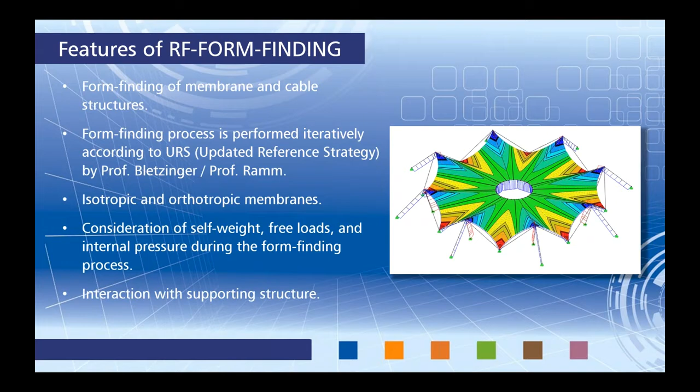Our other add-on module, RF Cutting Patterns, uses the minimum energy method for a very accurate cutting pattern. Essentially, we're turning this 3D membrane element into a 2D cutting pattern via the minimum energy method. We can also take into account uniform or linear compensation by warp or weft directions, meaning typically these membranes are going to be stretched when they're applied to our structure. So for the 2D cutting pattern, we can take into account that compensation. We can also apply these compensations for boundary lines around the 2D cutting pattern, so it doesn't necessarily need to be in the warp and weft directions.

We can also allow for different allowances, such as for welding and for boundary lines. Welding for overlapping membranes, maybe we need some additional material. Boundary lines for the upper and lower portions of the 2D cutting pattern as well. There is adaptable data organization, meaning even after we have performed the calculation for our 2D cutting pattern, we could go back and easily add in some additional material for welding and for those boundary lines without having to recalculate the 2D cutting pattern.

And lastly, I'll show you how to output the cutting patterns both graphically within the RFEM printout reports, as well as tables. These tables can be exported directly to Microsoft Excel for further sorting. And lastly, we can export them as a DXF file, open them up in AutoCAD, and show you how to utilize the cutting patterns this way.

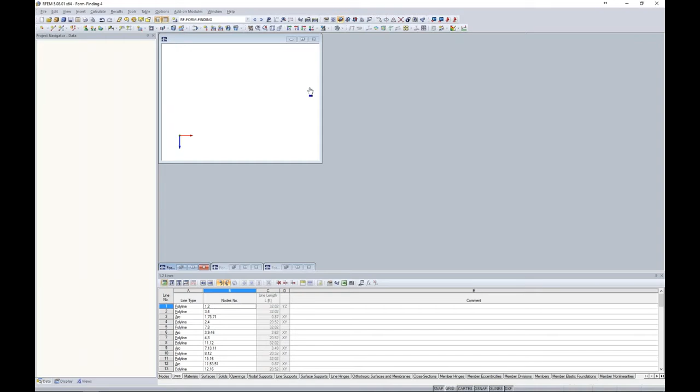So up pops RFEM, and you can see here that we have our basic graphical display in the center. We have our tables to utilize down at the bottom. Over on the left is our project navigator, which controls some of the input data. We'll also see our results available here, and lastly we have all of our tools up at the top. Today we'll be using all of these options.

I want to begin with drawing a basic line element. So up in my toolbar, I can choose to draw a new line, and you'll notice we have many different line types. We have a lot of AutoCAD-like capabilities within the program, so things like complex geometries, which is quite common for membrane type structures, is really no problem to model within RFEM.

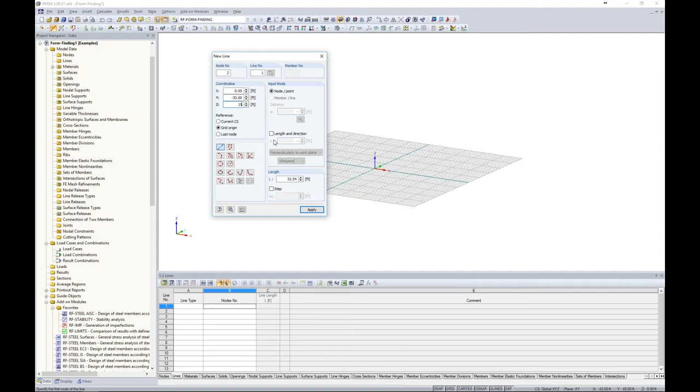To begin with, we're just going to do a typical straight line. I could draw this graphically in my viewport over here on the right, but I can also just enter in a couple nodes. For example, 0, -5, 35, then click apply, and enter my second node at 0, -30, 15, and hit apply. Now you can see we just have this line element in our 3D view.

I'm going to select this entire line and the nodes and use my rotate copy tool. Here I can specify that I would like 9 copies at 40 degrees, rotating everything about the origin 0, 0, 0. We have a nice feature down at the bottom: if I click on expanded settings, I can create lines between my copy nodes, and even more so, create surfaces between those lines. So now when I click OK through all of these dialog boxes, I have my conical structure with just a few clicks of a button.

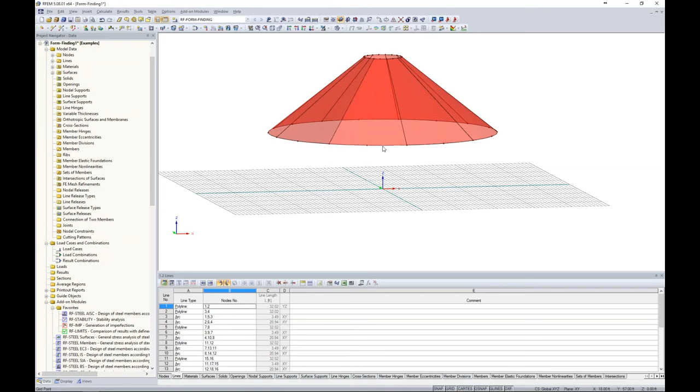Now turning this into a plan view, and turning off my grid down here at the bottom, I'd like to create cable elements spanning between my longitudinal lines here. Now a cable element certainly can't be constructed in the field as an arch type line like this, so we need to create straight lines. How do we quickly do this?

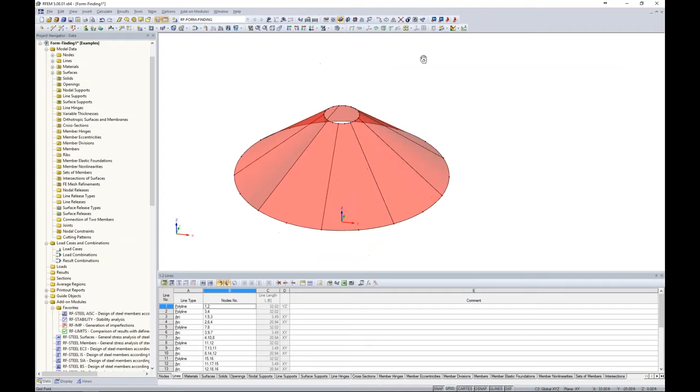I'm going to turn this into an elevation view, and highlight all of my lines down here at the bottom. You'll notice that my table 1.2 lines shows me exactly which lines I have selected in my graphical view. Using this feature within the table, I can show the selected objects only, so these are only my lines selected at the bottom of my structure.

The line type right now is set at arc. I'm going to change this to polyline, then using the F8 key, I can quickly copy that same setting down for all of my line elements here.

Now if I turn this back to my plan view, you'll notice these are now straight lines, but I still have this node in the middle that I'd like to get rid of. For this, I'll turn this into wireframe view, and now holding down my control key, all I need to do is graphically select all of my nodes here. Then I simply click the delete key, and I have these straight line elements.

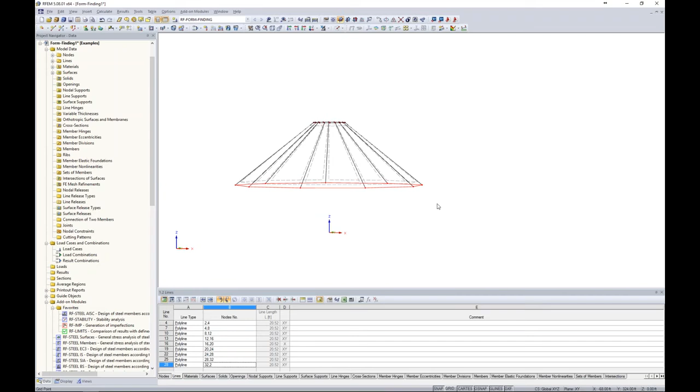So here I launch my cross-section database, and you can see we have many different cross-sections, such as rolled sections, built up, thin-walled, massive for concrete sections, timber. For these elements, I'm going to utilize the solid sections here. We have our filters over on the left, which show some different producers applicable to the Eurocode design, and we also have our AISC database.

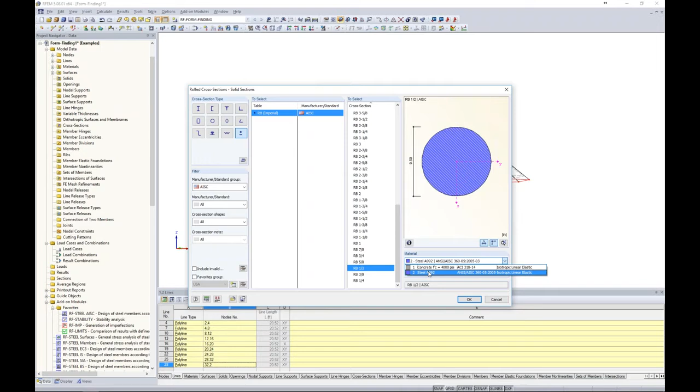Now I can scroll all the way down to the bottom to choose a 1/2-inch diameter cable element. My default materials within the program are 4,000 psi for concrete and steel A992. I'd actually like to create a new material here.

My material database is brought up. This looks similar to my cross-section database as well. I have my filters over here on the left, so you'll notice that under material category, I'm going to change this to stainless steel. Now I have the ASTM as well as Eurocode down here to select from.

Looking at ASTM, I have a very long list of all of my stainless steel materials. We can also utilize our favorites list, which I created a favorites list called USA. These are just common materials that I use quite often for projects, and you'll notice I added stainless steel A479 here. I can select this material and click OK through all of these dialog boxes.

Now the member type right now is set at beam. I actually want to change this to a cable member—that's the element that we're trying to model here. So now I can open up the member type. This is available because I've activated that RF form finding add-on module; otherwise you wouldn't see this option available.

Here we have the cable parameters for form finding, and with this we either have geometry or force. With geometry, we can set a target cable length or a target cable absolute sag, relative sag. With force, we can set a force in the cable or a force density. So these are the properties that we'd like to see after the form finding process is complete.

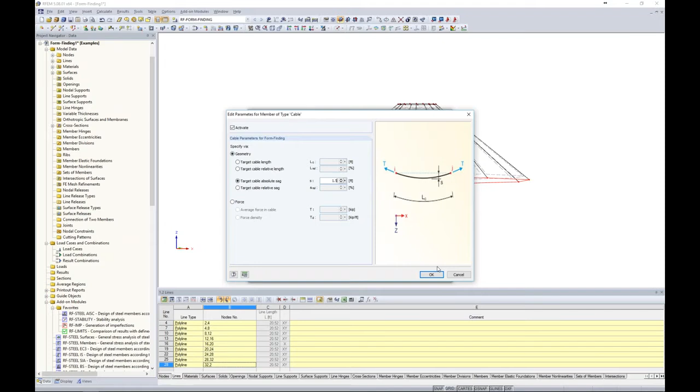When we're choosing geometry, this is maybe relevant for border cables and membrane structures such as what we have today. The force is an option that's maybe relevant for cable webs. For our example, we'll choose a target cable absolute sag of 1.5 feet, and I can click OK. Now that I have set this form finding capability, I click OK, and now we have the cable element specified down here at the bottom.

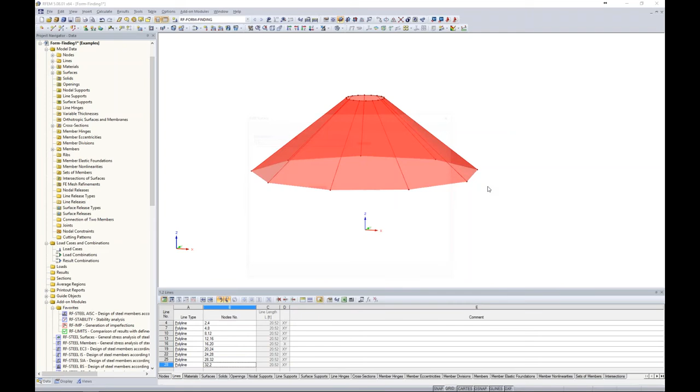So I want to turn this back into the rendered shape to show you guys that right now my surface elements are red. That means there probably is something missing within the program that is trying to flag me. If I highlight all of my surfaces, right click and go to edit, you'll notice that my stiffness is set to null—null means nothing. So we need to put in these material properties as well as our form finding process for our surface elements.

So the first thing I'm going to do is use my drop down to select membrane orthotropic, and here is where I'm going to create a new material. Now, membrane materials are not so straightforward as something like steel A36, A572, for example. This is something that maybe we get from the manufacturer, or maybe we do our own testing on these material membranes.

So when I go to create a new material, I need to first give it a description. Our material model by default is set to isotropic linear elastic. I actually want to change this to orthotropic elastic 2D. Now up pops my dialog box for my stiffness properties.

For this, I'm going to jump back to the PowerPoint here just to show you a quick screenshot of some calculations. For my membrane material, I got this from my colleague in Germany, and basically this is the calculations after placing this material membrane into a biaxial testing machine. We apply different forces, we get results based on stresses and strains with those different forces applied. We do our calculations in order to find out what these stiffness parameters are. So that's just a little history about where these particular membrane properties came from.

So back in RFEM, we can simply apply those stiffnesses here. For example, it was found that EX is 93 KSI, our EY is 84. Our shear modulus is going to be the same in all three directions at 0.15, and our Poisson's ratio is also important at 0.314. Now I click OK.

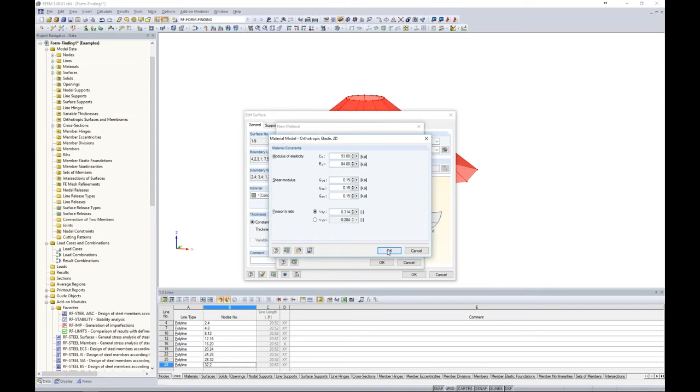So we have now defined the specific material that we'd like to use for these surface elements. Now, similar to the cables, we'd like to edit the parameters of the stiffness. Again, these are options that are available, especially this form finding tab when we activate the form finding module. The type we'll use here is constant thickness.

Under my next tab, constant thickness, I'm going to set the thickness at 0.04 inches. Then I can click on my stiffness matrix to see those values here, perhaps I'm interested in those. Under the form finding tab, this is the availability to define pre-stresses along the warp and weft directions with our form finding module. You'll notice that we have two different calculation methods, both the standard and the projection, and this just comes from the general form finding method URS that I mentioned in the PowerPoint.

Standard is really used for membranes supported by points, arches, or pneumatic structures. Pneumatic just means they are air-supported structures, supported by internal air pressure, which you can see down here is where we define that internal pressure. Projection is used for conical shapes, so that's actually the type we have today.

But just for example purposes, I want to show you what this form-finding deflected shape looks like using the standard method to begin with, so you can see why we've chosen the wrong calculation method. We want to define our forces, defined according to the warp and weft direction, so this is the local X and Y axis.

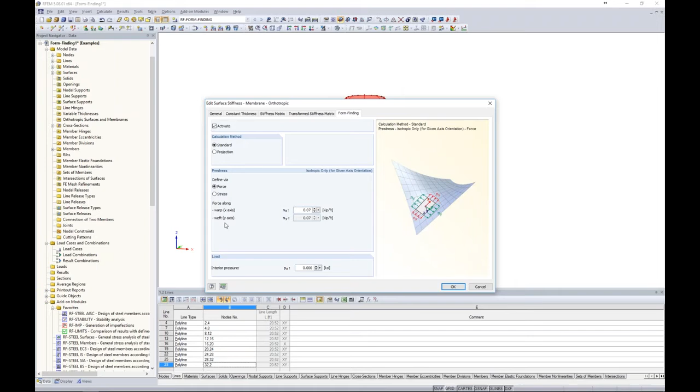Before I define these, it's important that we go back to our model. You'll notice my material is now blue because we specified these specific material properties, and I can right-click and turn on my local axes. If we're going to define these pre-stresses according to the local axes, you'll notice all of my local axes are going in different directions.

This is not good if we're going to apply our pre-stresses globally to all of our surfaces, yet they're going in different directions. So how can we address this quickly without having to redraw all of our surfaces? If I highlight all my surfaces and right-click to edit them again, we have a tab called Axes here. Axes allows us to quickly rotate our local axes, and for example this third option down here lets us point all of our local axes direct to a line.

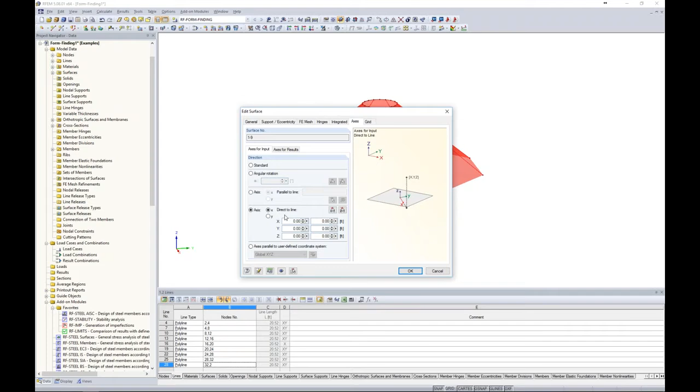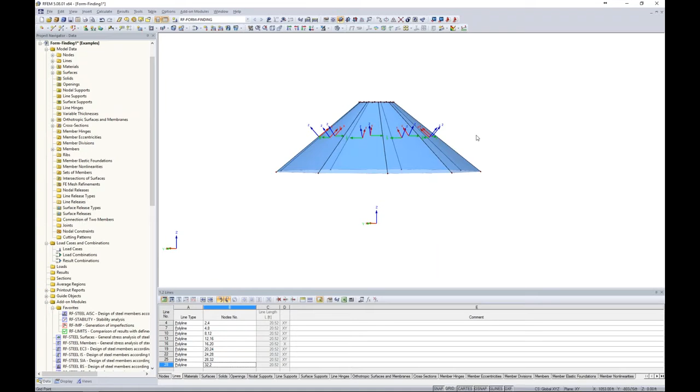This line can be a fictitious line within the model. Here, for example, we'll choose the origin as the bottom point, going right up the center of the structure, and our second point will be at the origin but at a Z elevation of 35 feet. Now when I click OK and take a look at my local axes, all of those X local axes are pointing right towards the center of my structure.

This is very important when we're defining our pre-stresses for our surfaces globally. So now going back to our General tab and our Stiffness Parameters, under Form Finding, here is where we can specify our force in the warp, or x-axis, and weft is the y-axis, also known as the longitudinal and transverse directions. So for NX, maybe we'll select 0.55 kips per foot, and we click OK.

Now that we've defined these pre-stresses, and I can turn back off my local axes, we'd like to run this form finding calculation. Before we can do so, we do need to support the structure somehow, otherwise we'll get some type of instability. So just applying nodal supports at the bottom, I have my typical hinged support here. I can highlight over the bottom and apply just a hinged line support at the top, nothing special.

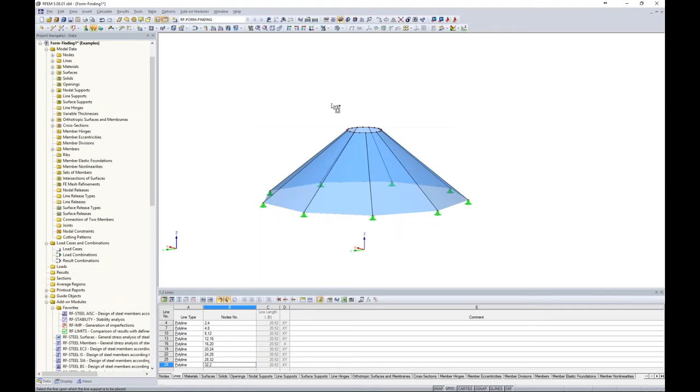So now with this RF form finding, we just click show results. It's asking me to start the calculation, that's fine, we're applying the URS method. Remember, we are running the standard procedure now, so in just a few seconds we'll get our deflected shape based on those pre-stresses.

So as we can see for our conical structure, this is not the ideal shape that we would expect. I think that should immediately flag us that we probably used the wrong calculation type. So highlighting all of these surfaces again, we can right-click to edit it, go back into our form finding settings, and let's change this to projection.

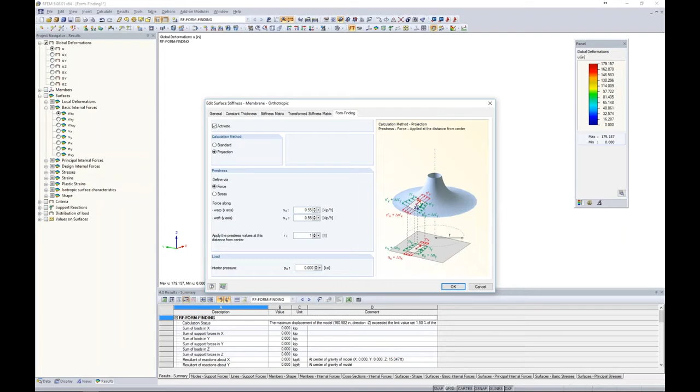I need to redefine my NX and NY here, and it's also asking me where I want to apply the prestress values from the distance from the center of the structure—we'll set this as 1 foot. I click OK, it's asking me to clear my results, that's fine. Now let's rerun the form finding process, still applying those same pre-stresses, but using a different calculation type here to get our deflected shape.

And now we can see that this looks much better in what we would expect for our conical type structure. So what does this tell us? Well, in our results, which is now available in our project navigator over here, we obviously can see the global deformations in inches here in our contours, but maybe we're interested in the internal forces of our stresses here. So I take a look at my surfaces, and in particular NX.

Now looking at my contours, I see at the bottom I have a stress of 0.566. Well, this matches our pre-stress that we put on the structure for the form finding process, or very close to it. So that's great. That's exactly what we'd expect. Looking at NY, exact same scenario. At the bottom we have 0.53. We applied a 0.55 pre-stress, so that's about what we would expect.

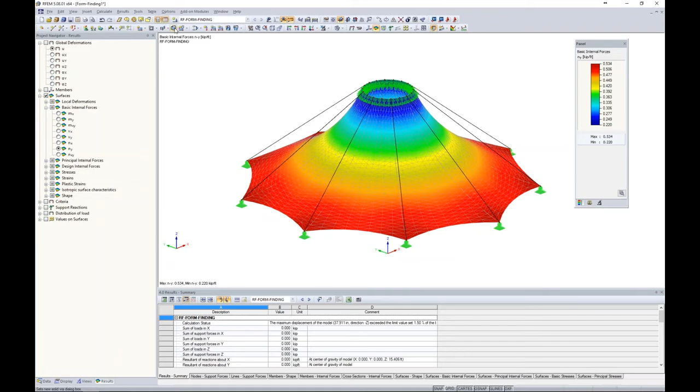Okay, so now that we have done the form finding process, it's time to actually apply some loads to this structure. Now, what we want to do is to maybe create a new load case here, and I can simply do this utilizing my tool up at the top, and I will give the first load case a description of dead load. Now, the action category is important because this tells us how we're going to apply these loads to the ASCE 7 load combinations, and in turn, which load factors should be applicable. So we will keep the dead load for the action category.

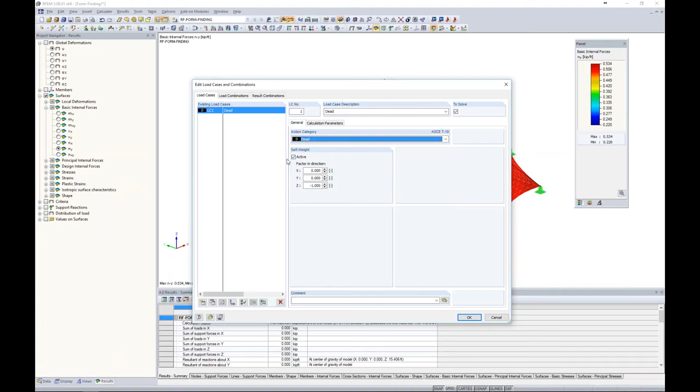Self-weight is checked automatically for dead load, so this will account for our self-weight within this particular load case. For all other load cases, we'll leave this as unchecked so we don't account for it twice. We click OK, and now you can see that no loads have been applied to our structure yet, but using the new surface load, we can specify a load direction in the global Z, and I'd like to apply a magnitude here. Now, let's say that this structure is just a basic canopy or something of the sort and really won't see too high of load.

So you'll notice I have KSF, kips per square foot right now. Well, I can easily access my units and decimal places, and maybe I want to change my area loads to something more like PSF, for example. I click OK, so now I can apply -1 pound per square foot, a very, very small dead load to the structure. I click OK, and then I can select all of my surfaces. So now you'll see that that dead load was applied to each surface. The hole at the top was taken into account. Everything was done automatically.

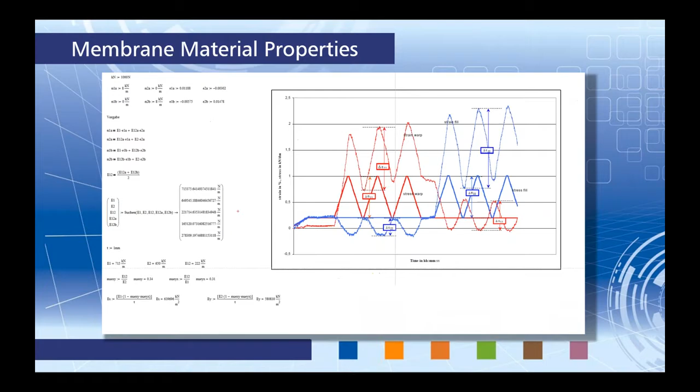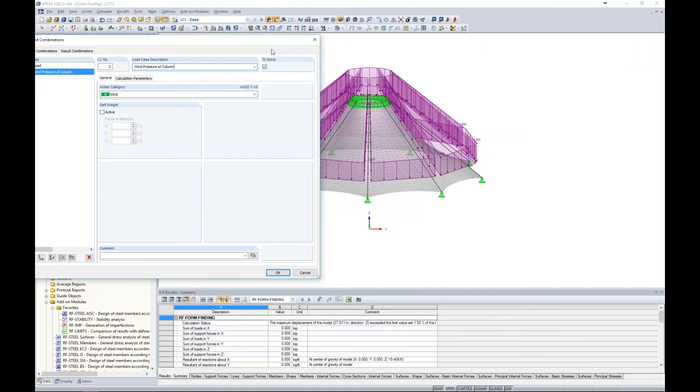So I'm once again going to create a separate load case here. The action category will be wind, and the description here will be wind pressure at column. Now I say at column because a little bit later on I will draw in 3 separate columns around our structure at 120 degrees. So this first wind load case will be that wind direction coming straight towards the column. I click OK. So now that I'm in a new load case from my drop down here, I don't have any loads applicable right now.

Putting this into elevation view, my first zone, zone D, from our table that we just saw is this front structure here, but it's actually 45 degrees around this front column. So what I want to do is I want to select this node down here at the bottom, and I'm going to use my rotate copy tool.

This time I'm only going to make one copy at 22.5 degrees. And I want to make sure under my details here to clear out the settings that I used before to create surfaces between my copied nodes. In the same sense, I'm going to do the same thing with my move and copy tool in the negative 22.5 degree direction.

So for my wind loads, I previously used this new surface load. New surface load will apply the wind load to the entire surface, which is not what I want in this condition. We have a nice feature here called free loads. So free loads allows us to apply basically any different shape that you can think of, whether that's circles, rectangles, polygons, all to our surfaces. So it doesn't necessarily need to encompass the entire surface. For today, we will use a new free polygon load.

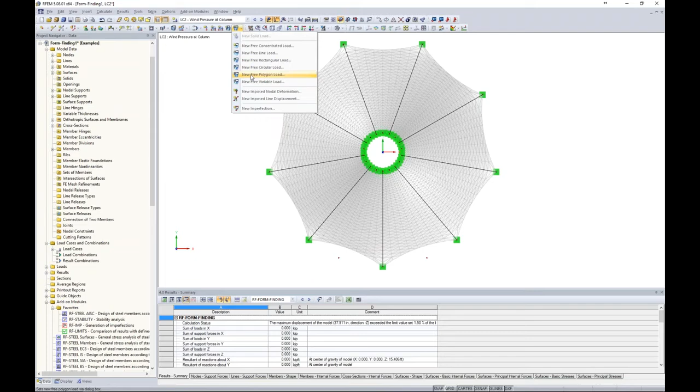Now for this, we just specify our surfaces. We can either select them graphically, or I can type in 1 through 9, or I could leave this as all as well. We're going to apply it in the local Z direction, which is normal to the face of the surface according to the local axes rather than the global. The magnitude here, I determined from that table, will be -9 pounds per square foot.

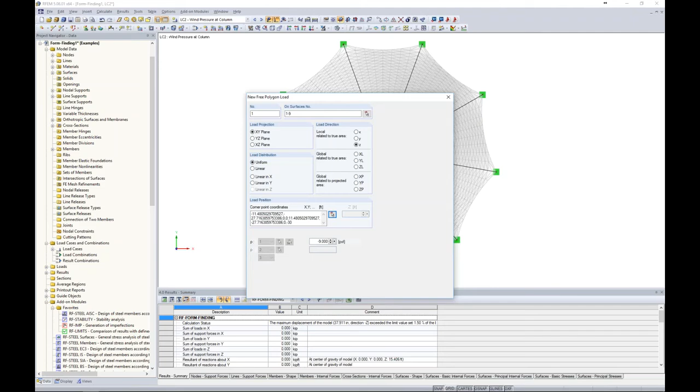Then I just select graphically my different nodes that I would like to apply this wind load to. I click OK, and now you can see that this wind load pressure is applied to the front of my structure, but not on the entire surface elements here.

Now, in the same sense, I'd like to do the same thing at the rear of the structure, but 120 degrees. So I'm going to, again, use this polygon load here. In the global Z direction, I'm going to change my magnitude to 8 PSF, and then I click on my different points at the rear of the structure. I click OK, and now we can see that there is a surface load being applied to the rear of the structure.

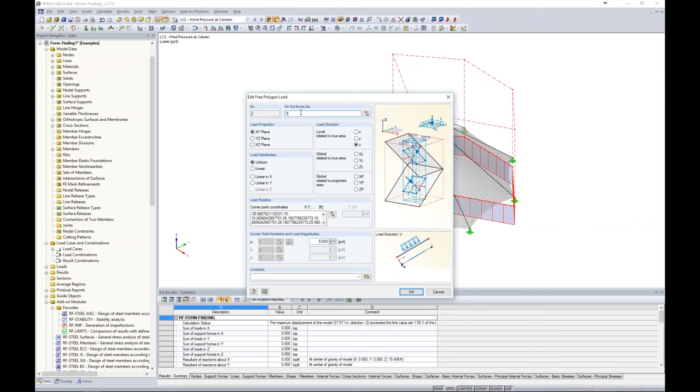And I just realized that I made a mistake. Looks like I applied this to surfaces all. It's the same thing. You can leave it as all or type in surfaces 1 through 9, but you can see the display is a little bit different. It just goes back to it being projected. We can project down through multi-level story buildings as well. But just for display purposes, I'm going to select this as all just so that it's very clear this is a suction pressure at the rear of our structure.

Now, in the same sense, I'd like to apply my other zone on the right side of the structure. So we again use a polygon load. We'll type in surfaces 1 through 9 in the local Z direction. My magnitude changes to 12 PSF. This is my highest load around the circumference of the conical structure. Then I select my points.

Now, something to note here, I would like to encompass half of this surface. Now, the program has snap settings, again, just like what you would see in AutoCAD. So it recognizes that this is the midpoint of that surface. So instead of creating a new node like I did previously, I can just use this snap point. I click OK, and now you can see we have that suction on the right side.

Now, lastly, we have a small zone here to do the exact same process. Surfaces 1 through 9. My magnitude is changing to 5 PSF, and I click on my remaining nodes on the right side of my structure. Okay, so now that we have these suction loads on the right side, we could do the same process for the left side, but I really want to show you those tools that make modeling a little bit more efficient.

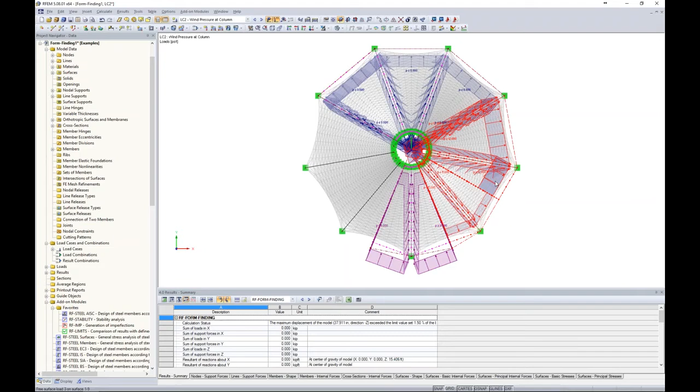I mean, we have a symmetrical structure here, so what we can do is just hold down our control key to highlight these two loads over here on the right and use our mirror tool. Mirror is something that you would find in AutoCAD. It's also available in RFEM where we can create a copy. We can mirror about the global axes and the origin. And I click OK. So now you can see that those loads are now generated on the other side of the structure. So essentially you can see how a very complex load can be quickly drawn within the program, especially for these conical type structures and membranes that would normally be very complex.

Now, as I mentioned in the PowerPoint, we want to take into account both pressure and suction from this front-facing wind direction. What I can do is go back to my load cases and combinations, and I can create a copy here. Now, instead of wind pressure, we'll call this one wind suction. I click OK. Now, my loads look exactly the same, but what I want to do is to double-click my load up here at the front. All I need to do is to change this to a magnitude of 7 PSF to account for that suction at the front of the structure instead, so just a different load case.

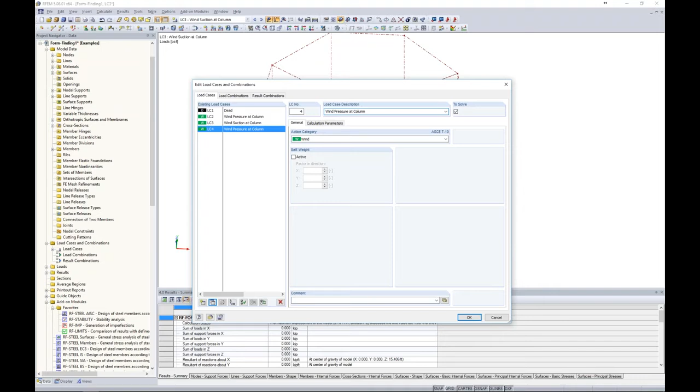Now we have our wind loads for both pressure and suction. Perhaps I'd like to take into consideration if the wind load shifts at any point along the structure. Well, what I'd like to do again is go back to my load cases, and I'm going to choose my wind pressure at column and create another copy of this. Now this time, instead of at the column, I'll call this one between column. I click OK. So what I'd like to do is to shift all of these loads 60 degrees over from where they're being applied now.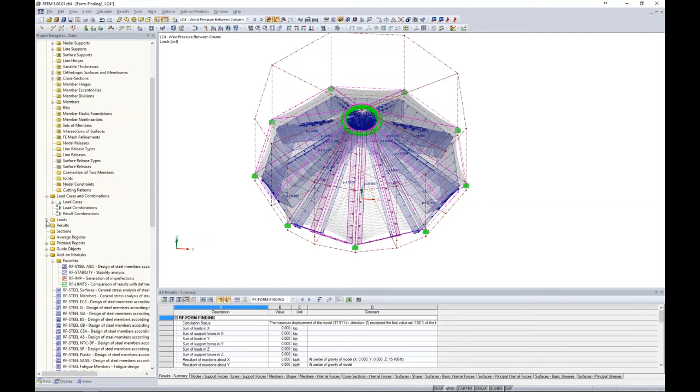For this, I'll utilize my project navigator over on the left. And this has all of my input data just like my graphical view and tables do as well. For example, if I scroll on down to my loads tree, I'll see my 4 different load cases. In LC4, I can expand my free polygonal loads. Well, here I can use my shift key to select all my surfaces, which are highlighted graphically.

I'm going to use my rotate tool. This, I'm not going to create any copies, and I am going to rotate it 60 degrees. Again, making sure that everything is clear in my detail settings here. I click OK. So now you can see that everything was just shifted over 60 degrees. Everything was taken into account automatically for our surface load application, and that's all that we need to do.

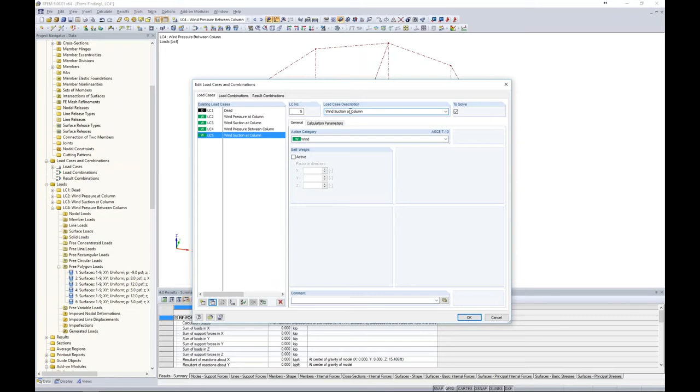Going back to the load cases, I do the exact same thing, but for wind suction at column, I create a copy, I rename it to between column, click OK. And then here, I just make sure that under my tree settings for loads, I'm under LC5. I select all of my free polygonal loads. I again use my rotate copy tool to make a rotation of 60 degrees. I click OK. And just like that, all 4 of my load cases are complete for my wind loads.

Now, lastly, I'm going to create one more load case, and we'll call this one snow load. The action category will be set at snow. I click OK. Now, because I didn't create a copy of any of my previous load cases, I should have no loads in this particular snow load case right now.

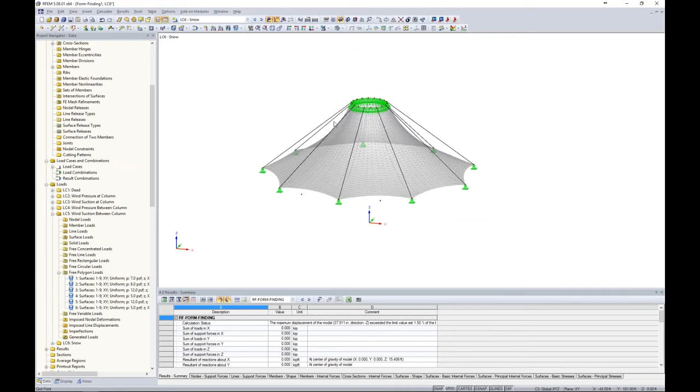For this, I am going to go back to our new surface load. I'm going to apply it in the projected Z direction with a magnitude of -8 pounds per square foot. I click OK. I can select all of my surfaces graphically, and here's my projected snow load, again with that opening taken into account and all of my surfaces. So that's really all that we have to do in terms of our application for our loading.

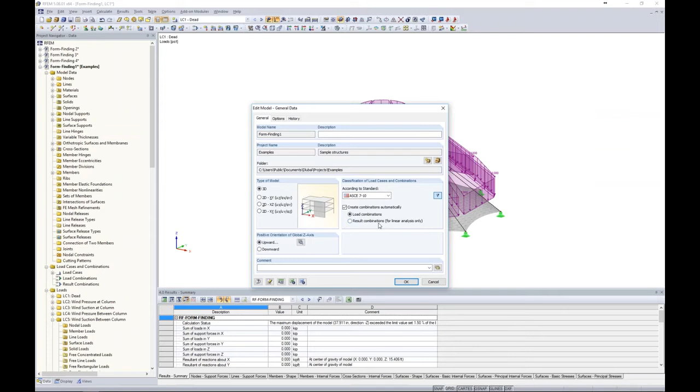Taking a look at our load combinations now. So it looks like I forgot after the fact, which is no problem. Going back to my form finding, I can right-click under my general data. I left this as unchecked. Well, I want to check it because I want my load combinations to be created automatically. So you can see that you can always go in afterwards to select that or unselect that.

So now going into my load combinations here, I take a look at my actions, and I'll see that I have dead load, wind load, snow load. Dead load and snow load, pretty self-explanatory, but wind load, we have 4 different load cases here. So how is the program going to apply these to the ASCE 7 load combinations? Well, right now it's set to alternatively.

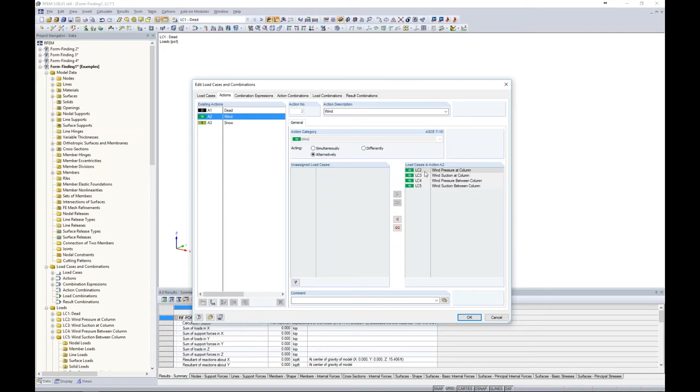So alternatively means it will be LC2 or 3 or 4 or 5. We can also choose simultaneously so that all 4 load cases are acting at the same time, or differently. Differently means that the program will come up with every different combination with these 4 load cases, such as LC2 plus 3, 2 plus 3 plus 4, 2 plus 5, and so on. So you do have control over those different action categories.

Now, combination expressions: automatically the program will create our LRFD load combinations as well as our ASD load combinations. Let's say for membrane design, I'm not interested in applying my LRFD load factors. So what I can do is just uncheck this for now. I'd rather just generate the ASD load combinations, and I can click on my info button here to see that my load factors are more around 1.0, which I'd like to use for my membrane design.

So then under the load combinations, you can see the program automatically generates our ASD load combinations based on the existing load cases in the program. And lastly, we have our result combination, which is nothing more than an envelope solution for all of our ASD load combinations. Now I can click OK.

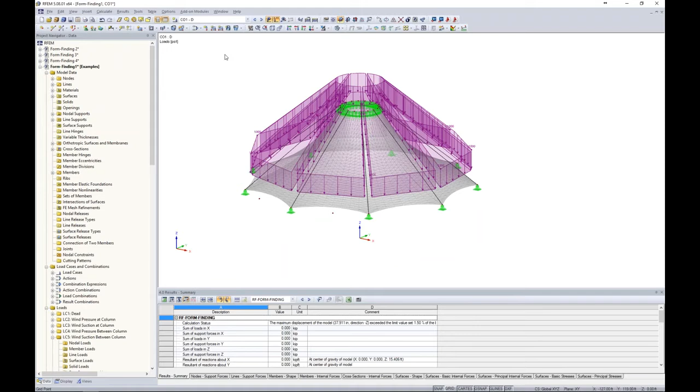So let's run one single load combination here just to view how our results will look. What we're going to do is utilize the RF-FORM-FINDING deflected shape, which we've already done, and just apply dead load to it. And you can see that solves rather quickly. Taking a look at our results now, it looks the same as what we saw with RF-FORM-FINDING, but now we should obviously see some higher internal forces and such.

For our membrane here, we can view our NY forces, our NX forces, for example, in kips per foot as contours. Remember, we have our cable elements down at the bottom, so I can view my members and in particular my internal axial forces for those cables at the bottom of my structure here. So that's what's available in terms of solving for the analysis only within RFEM.

Now for membrane design, you could take these internal forces, maybe you have an Excel spreadsheet that you use, or you do some hand calcs to do design of the membrane. I want to show you our other add-on module in the program that we can also utilize to do some design checks for our membrane elements. For this, we will launch RF-LIMITS.

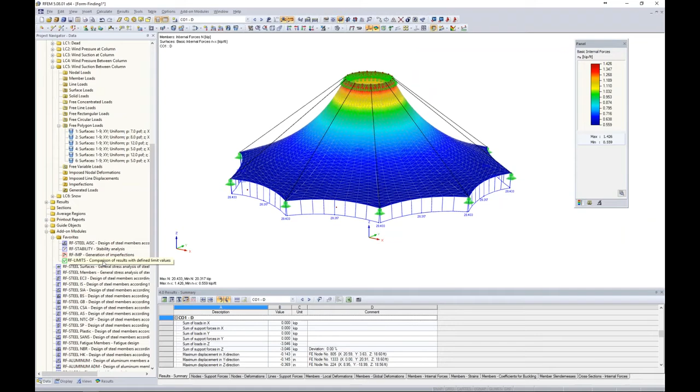So RF-LIMITS is pretty straightforward. This is an add-on module, and when I say add-on module, it's nothing more than just a dialog box that pops up within the program. We don't need to remodel anything. All that we're doing here is specifying some limit parameters so that the program can give us a design check based on internal forces to design capacities.

So for this first case, let's rename this case, and we will call it max dead. I click OK. So perhaps for this particular membrane, after our testing, we found out what the max NX and NY internal forces should be, meaning that the material should not exceed these internal forces, otherwise it's going to fail. So we have some specifications for dead load only now. So we're only going to check dead load, and I move on to limit parameters.

So my limit description, I can just call this one membrane. Now the object type, I'll select surface here. Now I can either select my surfaces graphically back in RFEM, or I can just type in 1 through 9 there because I know I have 9 surfaces. And then here is where I can select my limiting internal forces. For example, I have my NX force here. When I check this checkbox, the program allows me to input some ranges.

Let's say we've determined that the max value for dead load should be nothing more than 0.43 kips per foot, and I want my range to be somewhere in between this range. Now, this is tension only. So if I were to experience any compression forces, obviously that membrane is doing nothing within our structure, so we'd certainly want it to flag us. So I'd expect something up to 0.43 within the tension range. Same thing for NY. We give it a different capacity of 0.37 kips per foot, and the internal forces must be someplace in between there.

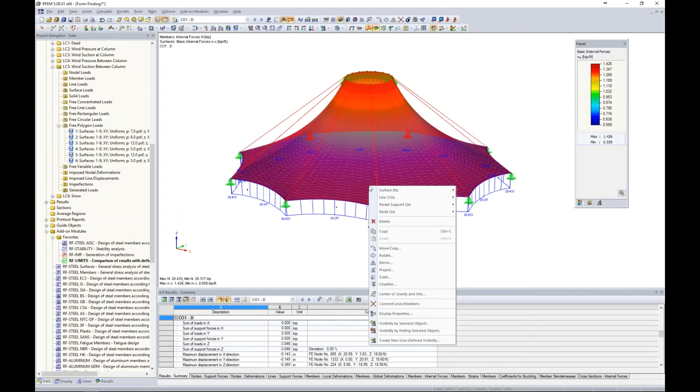Going back into RFEM, remember that I had defined my pre-stresses, which we can edit here. Take a look at our form finding tab. These are set at 0.55 kips per foot. Well, maybe I've determined that this is a little too high for my pre-stress forces. So let's change this down to something like 0.14.

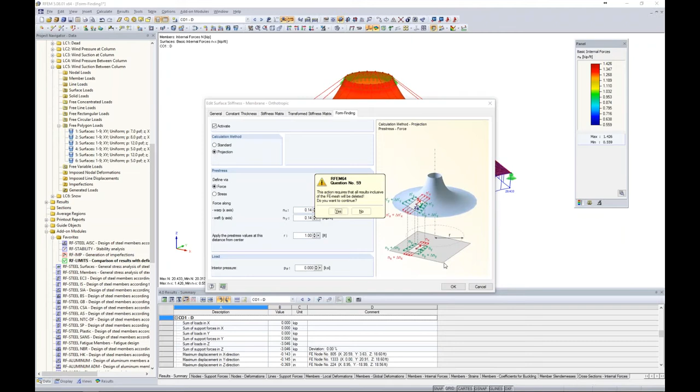And we click OK. So now you'll notice it's asking me to clear my results. That's fine. We've lost our form finding shape.

That's no problem. We can rerun that either here within RFEM, but if I just go back into RF Limits and click calculate, the program knows that it needs to recalculate the form finding, then apply the dead load combination to come up with those new internal forces, bringing those internal forces into this add-on module to compare to my limiting values.

Now you can see that we're around 0.409. That's within my range, so I get a design ratio of 0.95. So that looks good. Now I can also view the limit checks by surface.

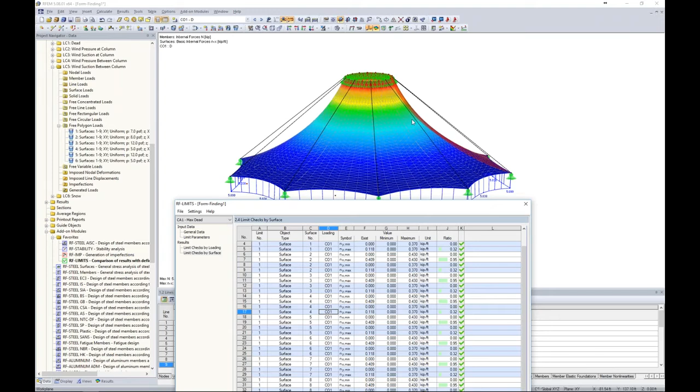So we have our table here of all of our different surfaces. What's nice is that as I'm scrolling down through this table, it is synced up to our graphical view within RFEM, so I can know exactly which surface I'm looking at.

So that's good for dead load, but obviously we have a lot more load combinations that we need to take a look at. So let's create a copy of our case here, and this time we'll call it max total.

So now for my max total under my general data, I have my controlling internal forces, my capacities for everything that should include dead load and snow load and wind load. So, you know, I've already checked my dead loads.

Maybe I'm not concerned with that, but I'll move the rest of my load combinations over here to check for my calculations. Now my limit parameters, again, I made a copy so it remembers all of my information from that last case that we just did, but I probably want to change my maximum values here since we're applying a lot more load.

For example, NX max might be something like 1.26 from our testing. And Y max might be something like 0.95 kips per foot, and now I'm ready to rerun that calculation.

So I click the calculation button, and because this does take a couple minutes to run, not very long at all, but just for time's sake purposes, I've already ran all of these load combinations in a saved model here.

So if we take a look at RF Limits, again, this is exactly what I just put in, 1.26, 0.95, and we run our calculation. It brings all of our internal forces, and we get our results here.

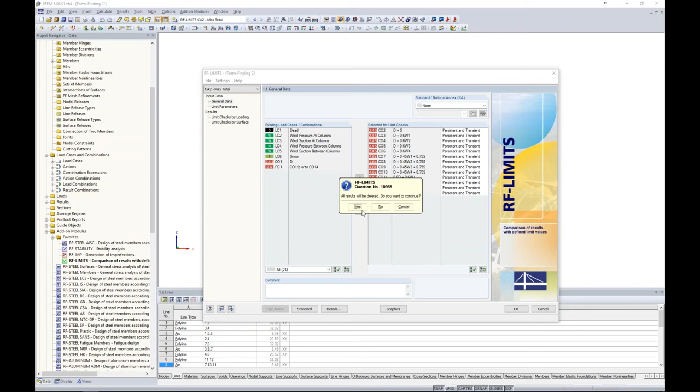So now when I click OK, it's asking me to clear my results. I can rerun the calculation, but what's nice is it only takes a split second because the calculation's already been run.

It's just purely how it's bringing in these internal forces into our add-on module. Now you can see that everything looks to be below 1.0 for all of our capacity values. So that's the reason why we were seeing some compression forces. Everything truly is in tension, it's just how we're viewing it within the program.

Okay, so we want to create one more copy of this case, and this one we will call max snow, for example. Going back to my general data, I'm going to move all my load combinations over here. Maybe I want to check dead load and snow load only, because we have some different capacities for snow loads being applied. My limit parameters, perhaps I'd like to set this, done from my testing, to 1.00 for my NX, and my NY will be 0.72 kips per foot. I can run calculation.

Internal forces are already there, so it brings them in here. It looks like we're at 0.96, so we're below that 1.0 ratio, so that all looks okay. So I'd say that our membrane design per ASD load combinations is pretty much done.

But remember, we did have those cable elements in there. Well, we can use RF limits to check our cables here as well. So for this, I'm going to create a new case, not a copy, and you'll see why, that we'll call this one cables. Now, I can use my result combination here, which again is nothing more than an envelope solution for all of these load combinations. If I want, I can move all of these load combinations over here in place of this one, or both of them. This is the same thing, it just simplifies our results a bit.

Keep in mind that these are being designed per ASD, so probably later on we'll come back and check these against our LRFD load combinations, which are more typical for design rather than ASD. But just to double check, for now, if we weren't passing ASD, we certainly won't be passing LRFD, and it looks like we have a ratio of 0.77. So everything looks good so far in terms of our code checks or our design checks for the ASD load combinations.

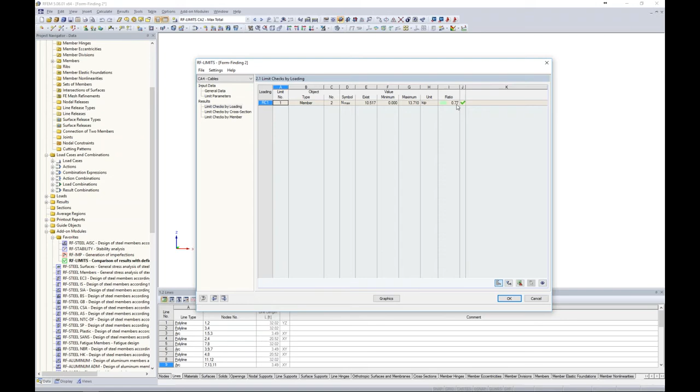Okay, so now that we've completed the membrane design, let's consider the supporting structure. I mean, the membrane design is great, the cable design is great, but maybe we'd like to incorporate it with the rest of the structure here, all within one model.

So what I'm going to do is I'm going to get rid of these supports, but before I do so, I want to double click and show you an interesting feature that we have. We can edit this support type or create a new support type, and of course we have our translation and rotation for our restraints. We can also put in some partial fixity here with spring constants, and then we have our nonlinearities.

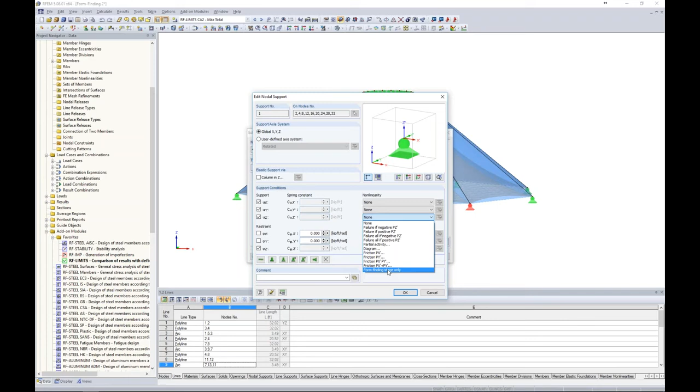In my drop down from my nonlinearity, you can see that I have this option called form finding stage only. So what this allows us to do is to apply these support conditions only to the form finding process. Then when we move on to, let's say, our ASCE 7 load combinations, those constraints are no longer taken into account, they don't exist at all. So this is almost like a construction type phase that we can automatically account for within the program, just a nice powerful feature to do so rather than manually having to do this.

For our case today, I'm going to use my project navigator though and open up my Nodal Supports. I can right click just to completely delete them. I'm going to do the same thing with my line supports, right click, delete. And now putting this into plan view, I'd like to create a ring type member at the bottom of my structure here.

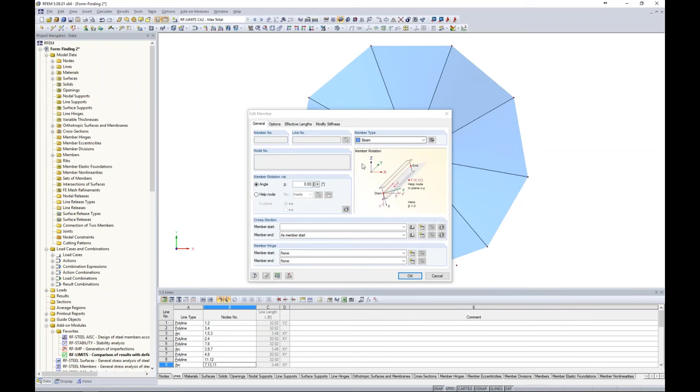So when I check this checkbox, I can create a new member type. The member type is beam here, just any typical beam or column element within the program - we're not working with cables anymore. I open up my library for cross sections, and here is where I select my circular hollow sections. Using the filters on the left, we have AISC, Canadian sections, and many other international standards. For today, we'll use an HSS 10 by 0.75.

Now the material is steel A36, so I want to create that new material. Utilizing my filters, I see steel A36 up at the top for my ASTM. I click OK through all these dialog boxes, and then I see my beam automatically generated around the bottom of the structure. So that was fairly easy.

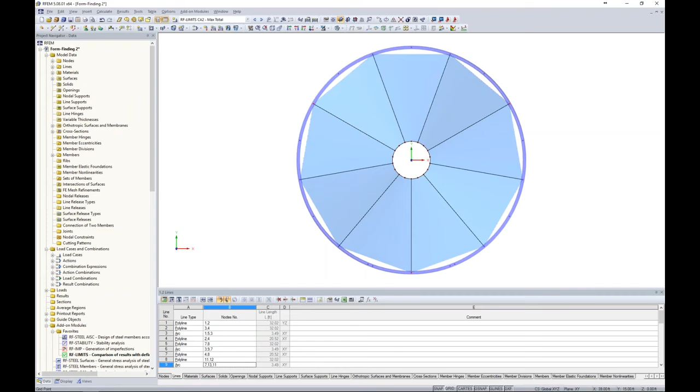Now in the same sense, I'd like to create my 3 columns that I mentioned before - a column up at the front and a couple columns in the back, all 120 degrees apart. You'll notice I held down my control key to select these 3 nodes, and I'm going to utilize my move copy tool. We will create 1 copy in the negative 15 foot global Z direction.

Now I'm utilizing this feature just to show you some different options within the program. You could easily draw in these columns with a couple clicks too by drawing in a new member. So this is just one other way to do it.

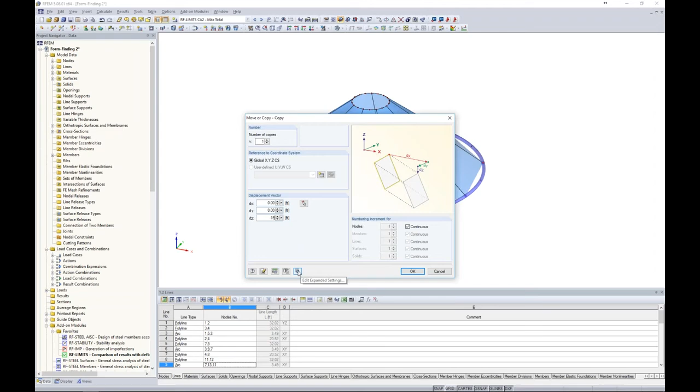Under the details settings, we'll utilize the copied lines and members between the nodes and create a new cross section here. I want to utilize an HSS section, but I'd like to choose a slightly smaller one. We'll choose 8.625 by 0.25.

Steel A36 I've already defined within the model, so now I'll always have this option every time I go to draw a new member. I select steel A36, I click OK.

I would like to have a member hinge up at the top, so I'd like the moment to be released at the top of my columns. For this, I can easily create a new member hinge here. I get a nice little picture showing me exactly what my local axes are. The program suggests I probably want to release my Y and Z axes, and that's correct - I'd like to release those for my moment.

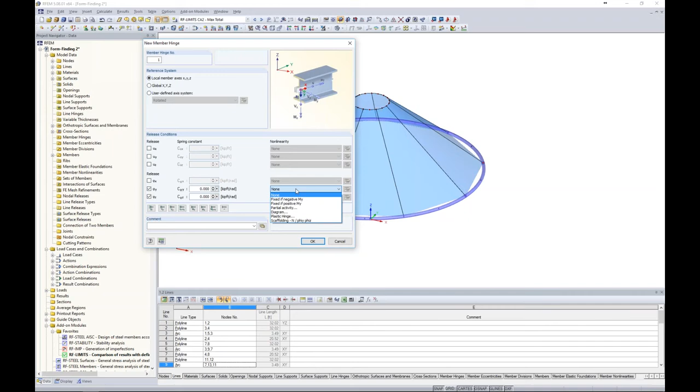Just like our nodal supports and line supports, we have spring constants here for partial fixity, and we can also get into nonlinearities such as partial activities, slotted joints, things like that. For us, we're just applying a simple moment release. I click OK through all my dialog boxes, and my 3 columns are created.

Then I can apply nodal supports in a similar fashion like what we did before, just to the bottom of the structure. Now, I want to continue modeling because obviously the center of our structure is not supported, but for this, I'm going to jump to a saved model just for time purposes.

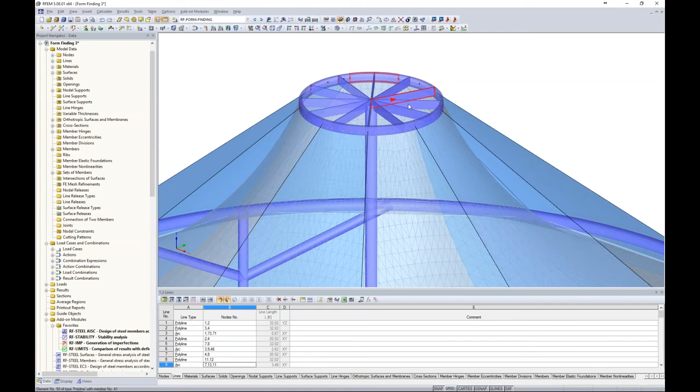You'll see that I have created this column up the center of the structure. I've added some braces to my outer columns here. If I zoom in up to the circular opening, I applied an MC shape, 8 by 20, to that exterior circle. And lastly, just some flat bars to tie it to that center column - these flat bars are just 1 inch by 8 inch bars. So you can model in the rest of your structure here with any type of materials, whether that's aluminum or steel, to account for the supporting structure.

So how do we utilize some of our other add-on modules to do a complete design of our membrane structure? Remember that we've already done the membrane design, which you can do with this structure I'm showing you right here. But let's take a look at our other add-on module, RF-STABILITY. RF-STABILITY is pretty powerful in the sense that we can do a stability analysis to show our different buckling shapes from an applied load. For example, I created this first case here called vertical.

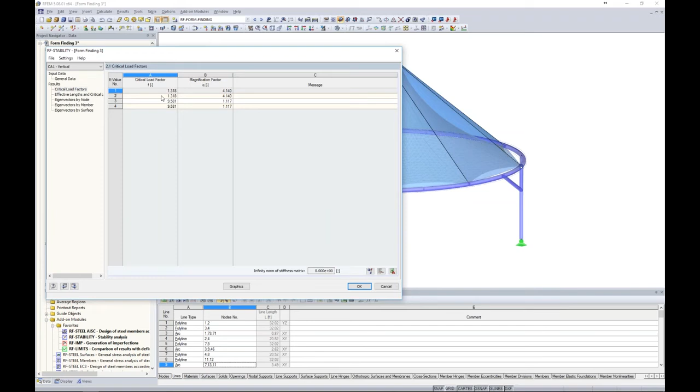I applied my load case dead load. Then when I run my calculation, I get my critical load factors for my structure. This is based on the buckling behavior of my entire structure with 4 different buckling modes.

I can view this graphically, which I think might be a little bit more interesting. Based on the applied dead loads, for example, I have my eigenvectors here, only to a max of 1.0 and they're unitless because it is an eigenvalue analysis. And I can view my different mode shapes. I only solved for 4 mode shapes here, but I can view the different buckling shapes.

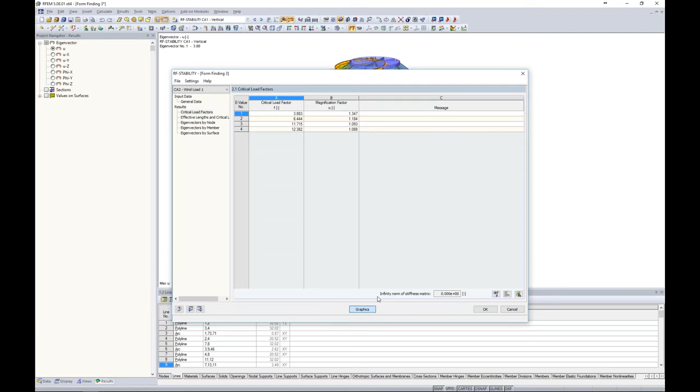Now, in the same sense, going back to RF stability, I have created a second case here called wind load, and I imported in my load case number 2, my wind pressure column. I run my calculation, I get my critical load factors for now my first wind load case. Again, I can view all of this graphically to view the different buckling modes. So it's quite interesting to show you what the behavior of the structure is under those applied dead loads and wind loads. So why do we do this?

Well, back under data, we have another add-on module called RF-IMP. RF-IMP allows us to apply imperfections to the structure. Now, imperfections can be related to the AISC, Chapter C, the direct analysis method, where the code tells us that if we want to apply things like notional loads, for example, to account for column out of plumbness or member out of straightness, we can apply imperfections and manually model these type of imperfections.

It's certainly important in Eurocode, as the Eurocode calls for imperfections within all of our load combinations. AISC is not so straightforward with that. It kind of really depends on some different factors, but regardless, it can be applied for all design no matter which standard you're looking at.

So when we're looking at RF-IMP, we can actually import the buckling mode from RF stability. That was what we were just looking at in our other add-on module. You can see all of my different cases here. For example, my first case, vertical. Now I can export those imperfections that are being generated by RF-IMP as a load case. So load case number 7, and I've named it vertical.

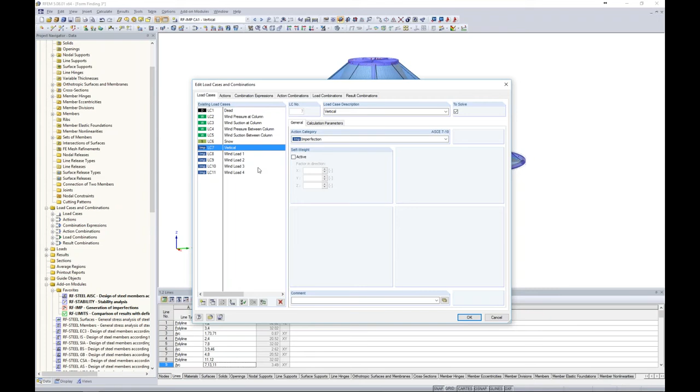So once I click generate, what exactly does this look like? Well, taking a look at my drop down here, I can take a look at the vertical here, and it looks like it's not showing up quite yet. Let's see. Well, regardless, we can view them graphically, but let me make sure that they are being exported here under our load cases. So like I said, these imperfections are being exported here as load cases such as vertical, wind load 1, 2, 3, and 4. I click OK. Let's take a look, let's see if any of these other ones are showing up.

Yeah, there we go. Okay, so here they all are, and basically this is what it's accounting for, column out of plumbness. We can zoom in here and see this is set at L over 500. So these are just dependent on our normal forces within that column, and then we can account for that column out of plumbness, like I said, or we can account for member out of straightness with these imperfections.

So as I mentioned, they're exported in as these load cases, and then under combination expressions, you'll see here that I activated my LRFD load combinations for design purposes. I unchecked my ASD because now I want to move on to my member design. But keep in mind, you can utilize both LRFD and ASD within one model. I'm just trying to simplify for today's purposes.

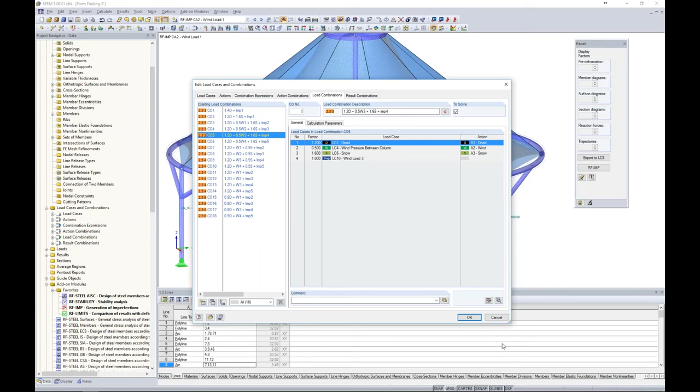So under our LRFD load combinations, we can activate these imperfection load cases. Then under here is where we can say, okay, we'll apply this imperfection with this load case and this imperfection with other load cases. So just some parameters here on how to apply those imperfections. Then under load combinations, you can see all of the different imperfections applied with their associated load cases such as wind load. For example, LC9 is the imperfection from wind load 2 applied only to wind suction at column. LC10 is wind load 3 applied only at wind pressure between column. So that's just kind of how we can apply those imperfections to the rest of the structure.

Now, lastly, we can run an analysis, a code check here from our analysis according to the AISC module, for example.

Same goes with Eurocode or the CSA Steel module. Basically, I created two cases here just called beams. I checked all my beams and braces, and I am checking them against my LRFD load combinations. And keep in mind that this module looks very similar to our RF limits module. So once you learn one module, the rest of them are pretty intuitive to use, which is nice.

And then I also ran a second case to take a look at columns here. We run our calculation based on these LRFD load combinations, and we get our code check directly from the AISC. So it looks like our columns are well below 1, judging by our big green smiley face here, and we also have our beams and braces at 0.73. We can view everything graphically as well to see that everything is below 1.0.

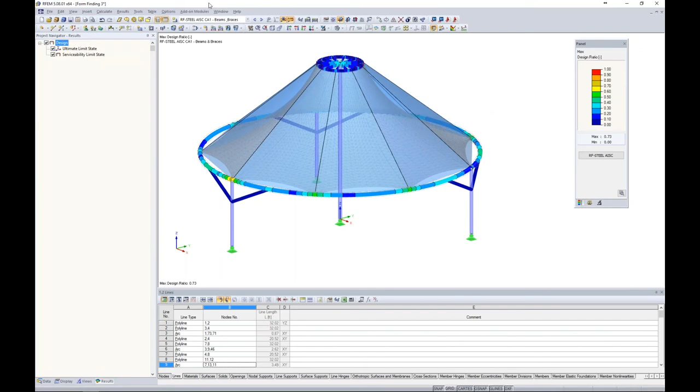So again, this is just to show you guys that you can utilize all of these other add-on modules for a complete structure design. If we want to go back and take a look at our form finding, we can do so here with our membrane. So everything is tied together. Okay, so that really completes the overall structure design.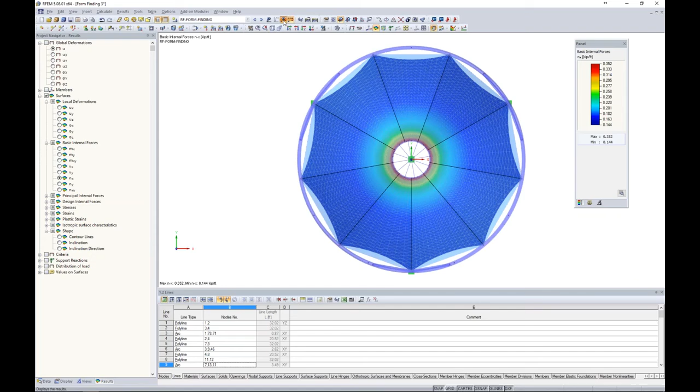Now the last thing to touch on is the RF cutting patterns. So for this, let's turn this into an elevation view and turn off our results. So as far as cutting patterns, remember we're trying to turn this 3D membrane element into a 2D pattern in order to give to the fabricator, whoever is going to be producing this membrane. And right now, these surfaces are pretty large for our 2D cutting pattern.

So, you know, we could take these surfaces and cut them in half, but that would require some remodeling, and it's not very user-friendly. So we have a nice feature in our Project Navigator that we can right-click under lines to create a new line. And again, this is what we saw at the very beginning of the webinar, but instead we're going to choose Cut via a section. So all this is going to do is it's going to apply it to surfaces 1 through 9.

We move on to the next tab, and I'm just choosing a couple points here of where to make my section cut. So for example, I can graphically choose up here at my origin. My second point, maybe we'll go with this surface right here. I'd like to choose the cut right down the center, so I'll choose my second point down here. The cut type will be a section, and the definition type will be according to a direction vector. So this direction vector can be something completely arbitrary. For example, I can just put 1 foot here in the global Z direction.

I click OK, and now you can see that that line was added to this surface element. This is still a single surface. It's just purely a line that was added. And what I can do is I can highlight this line, and I can use my rotate copy tool, which is the same thing that we've been using, but you can also right click on an element to utilize this tool.

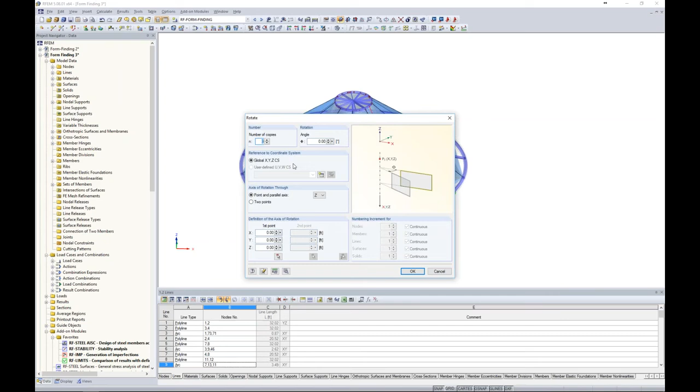Here I'm going to create 8 copies at 40 degrees. Make sure that my settings here are turned off. I click OK. And now the program is going to create a copy across all of my surfaces of just that simple line element. Nothing too complicated here. So now going back to my elevation view, I want to generate my cutting patterns. And for this, I just simply go to Tools, Generate Cutting Patterns from Cells.

Now this dialog box is very simple. It's asking me what surfaces to apply it to, 1 through 9. And do I want to ignore any of these lines? Well, no, I don't. I just added these lines to create smaller cutting patterns. So I click OK. And then the program generates these 2D cutting patterns. You can see this little symbol here that I can double click.

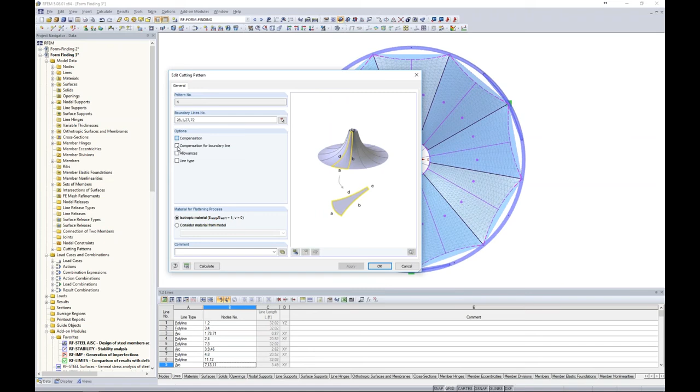So when I double click this symbol, it's quickly calculating through to determine the cutting pattern from a single membrane as far as the input data. So this is for pattern number 4, which we can see is highlighted here. And we have some options such as compensation, compensation for boundary line, which as we select these, we get these tabs that are populated up at the top. So taking a look at these tabs in particular, if we look at compensation, remember that these membranes are probably going to be stretched when we apply them to our structure.

So as far as a 2D pattern, we need to take that compensation into account. Now we can do so whether that's standard in the warp or weft direction. We can even apply it at an angle if we'd like to. So as far as the compensation, we can apply a percentage here, for example, the warp direction or the longitudinal direction of 1%. And we can do so with the weft direction, the transverse direction, at 3%. So this is more of a uniform application to this 2D cutting pattern.

Under the next tab, different compensation by lines, well, this allows us to take into account different compensations for each line, boundary line, if we don't want to necessarily do so more in a uniform manner that we did on the last tab. Here we have allowances. Allowances are for welding lines or for border lines. For example, let's say at the top and bottom of the 2D cutting pattern, we'd like to add 8 inches of additional material. Well, we can easily set that by setting this to 0.66 feet.

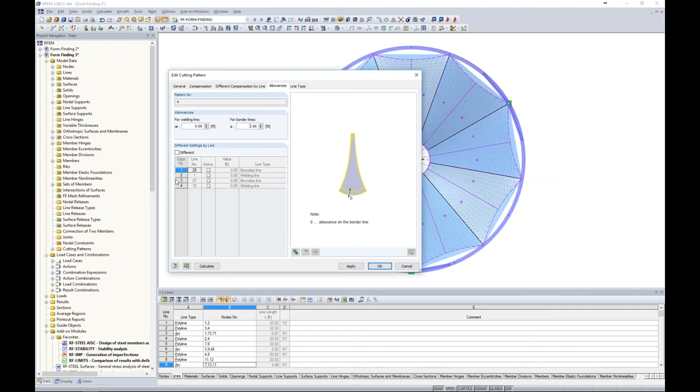Then down here at the bottom, if we don't want to globally set those again, we can check them on for a different application for each boundary line or welding line. For example, taking a look at line number 72, which by the way, we can always activate our numbering for our lines back in RFEM and have those on in the background as we're looking within this dialog box if we don't know which line number 72 is. But I'd like to activate this because my adjacent membrane may be overlapping this a bit. I want to add in 4 inches to this particular welding line.

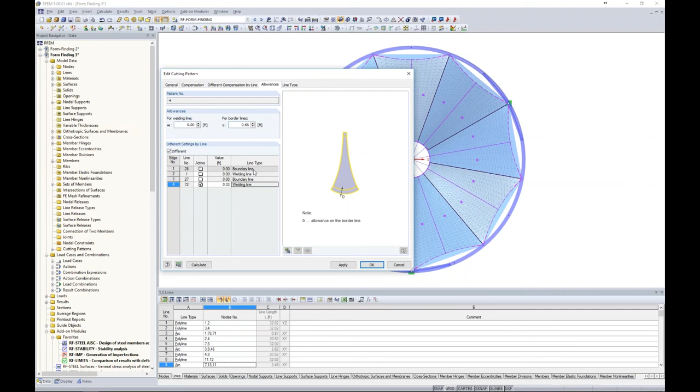Now you'll see that the boundary lines are automatically calculated by the program. It's pretty smart with those, but if you're like, oh, that's actually not a boundary line, I'd rather it be a welding line, well, that's where the line type, you can use your drop-down box here to change that. So now that we're done with all of our input, we can click Calculate. Now, I have an additional module here that I can launch because for all of these different 2D patterns I set each one to have its own border and allowance additional width to it. And then I ran the calculation for all of my different patterns.

So now we get a couple different tabs up here, which is our 2D cutting pattern. And once we run the calculation, we get the X and Y coordinates for our 2D pattern here. Now, this is a table, and as I scroll through this table, it is synced up to my little graphical view over here on the right. I can always zoom in, and it's all based around my origin right here at the center about what these X and Y points are. I can also turn on my global mesh here within the cutting pattern. And right now, this is without my allowances, so without that welding and additional allowance at the top and bottom. So I can also toggle that on.

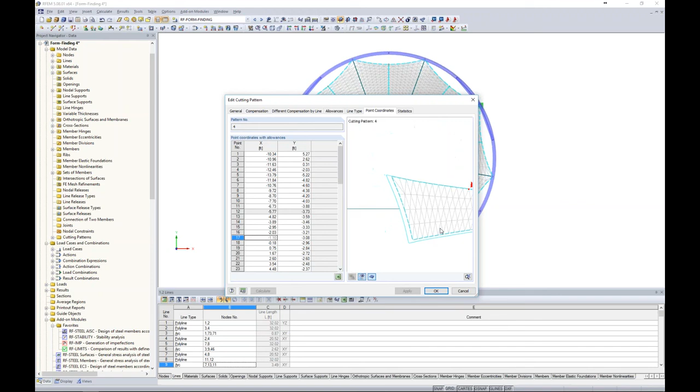You can see here's my 8 inches at the bottom, here's my 4 inches at the side, and my 8 inches at the top. And now my point coordinates here should reflect these different allowances taken into account, which, if we zoom in here, we can see. So here's our option to export directly to Microsoft Excel. I think this is a very powerful feature because obviously Microsoft Excel will have a lot more capabilities in terms of sorting data than what any structural analysis program could do. So we give you that option to do so here.

Under statistics, this just gives us our area, our 2D area, our 3D area. Again, we're turning this 3D area into a 2D area based on the minimum energy theory. We also give you the height and width of the 2D cutting pattern with and without allowances. So that's basically all as far as the output for the cutting pattern.

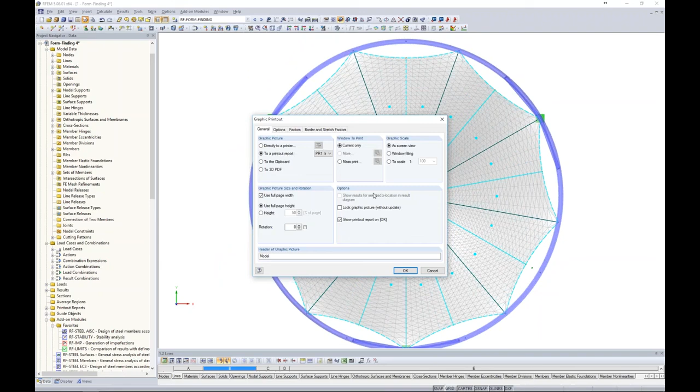Now, let's say we would like to generate this to our printout report, and we'll start with generating a nice picture here of our plan view. Well, for this, I can simply print my graphic, and we'll choose the current view only to use the full page width, full page height. We click OK. So what the program's doing now is it's cycling through to create my printout report, and it takes just a second here because it's collecting all of the input data and all of my results, especially including my cutting patterns, and creating a printout report.

So up pops this separate application. And you'll notice that we have our table of contents on the left and we have our actual report printout on the right. And here's that picture that I just generated. So this is my plan view of my different cutting patterns.

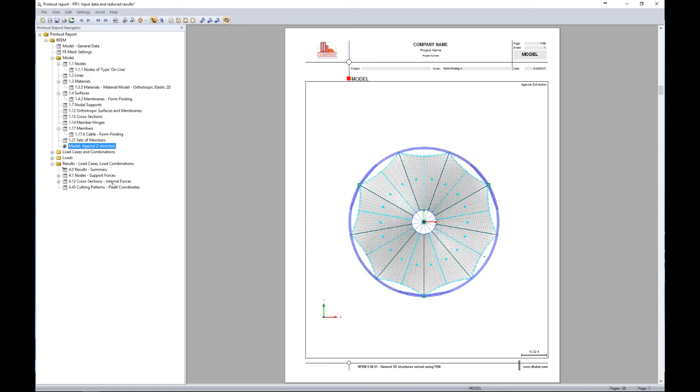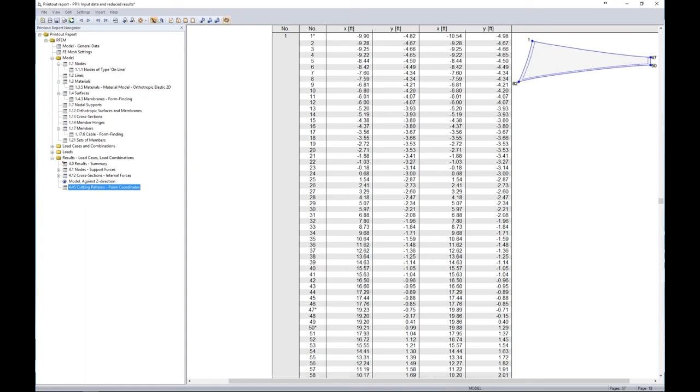Maybe I'd like to move this to coincide with my cutting pattern point coordinates down here at the bottom. Well, I can easily do this by dragging and dropping it, and my printout report will automatically update. So I can jump down to that picture again, and if I scroll down, well, here is where my cutting pattern information is. So here's my X and Y coordinates without overlaps, with overlaps. This is for pattern number 1.

I have a nice little picture generated here with my node numbers, and I can scroll down to all of my different cutting patterns. So it's very powerful in how we can present this information in our printout report as well.

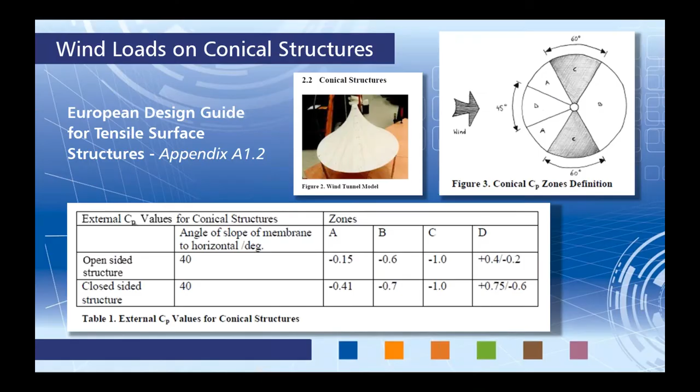So one final thing to show you is how to export this information to a DXF file. What we can do here is go to File, Export, and down at the bottom we have this option for formats for cutting patterns according to a DXF. Now we will have an additional tab populated here, and this is where we can export our cutting patterns. And then we just give it a few parameters here, such as the number of patterns per row.

Well, I can set this to 3, for example. The distances between patterns can be set at 3 feet. Here is where we can export the 3D shapes or our overall structure. We can also export the cutting patterns FE mesh or uncheck this if we don't want to see it. And lastly, we can export the 2D cutting patterns as 3D face elements.

So I click OK. I can save this DXF file, and what the program will do is to cycle through and to export this, and then up will pop a little dialog box telling me that the data export is complete. Data successfully exported to file. So now in AutoCAD, what I can do is just to open that file, which I already have saved here. This is just the DXF file that I just created.

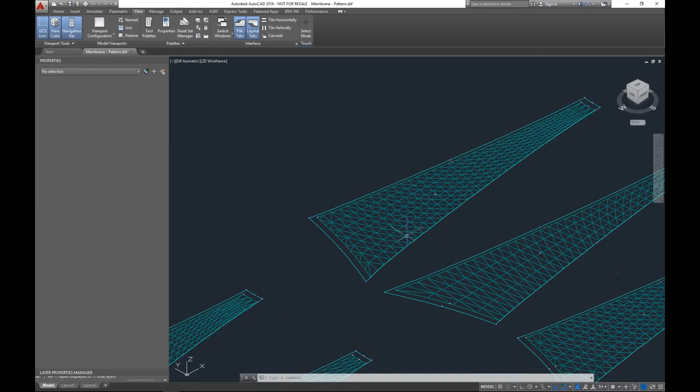And you'll notice that this is my model that I just created. Here is my 3D element, and here are my different cutting patterns. If I zoom in here, I'll see that each one is labeled according to the different cutting pattern that we had in RFEM. We have our FE mesh that was generated in addition to our tolerances, both for the welding line as well as the top and the bottom offsets here.

And of course, within AutoCAD is where we can add dimensions for these cutting patterns, because everything is to scale according to the point coordinates that were created in RFEM. So again, very, very powerful in terms of creating these cutting patterns.

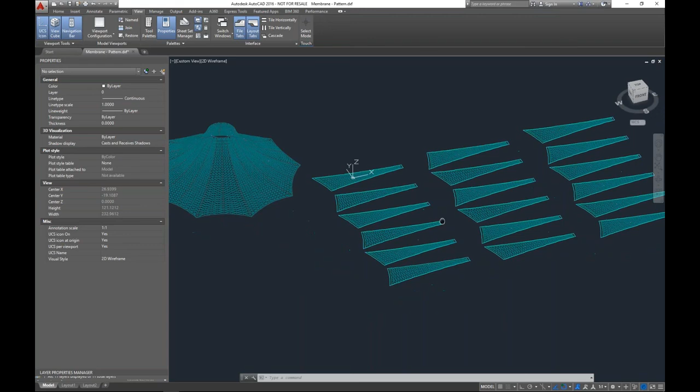Okay, so with that said, jumping back to the PowerPoint, we can sum up today's webinar. I know this was quite a bit of information today.